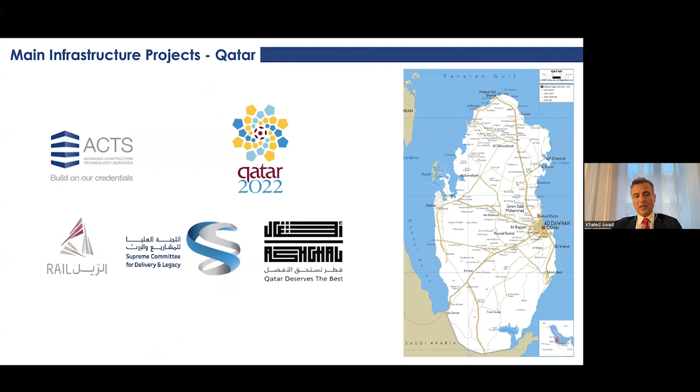To be able to do the presentation, we had to get information from RAIL, the Supreme Committee for Delivery and Legacy, the rail authority in Qatar, and the Public Works Authority which is called Ashghal.

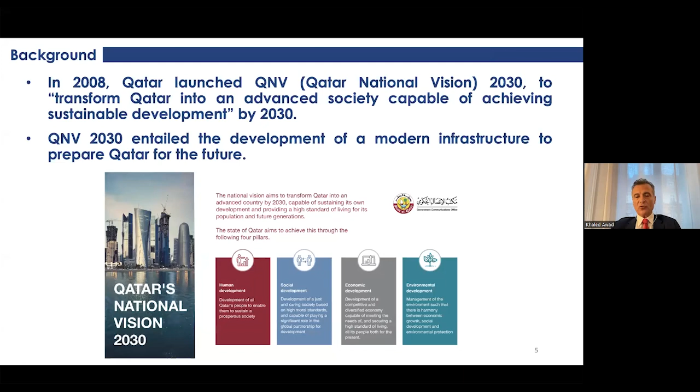Before it won the World Cup, Qatar started in 2008, launched the Qatar National Vision 2030, which was supposed to take Qatar and make it an advanced society capable of achieving sustainable development by 2030. They made this vision implementable through identifying 4 main pillars: human development, social development, economic development, and environmental development. These 4 pillars were really driving Qatar's spending during the last 12-13 years since they launched the vision.

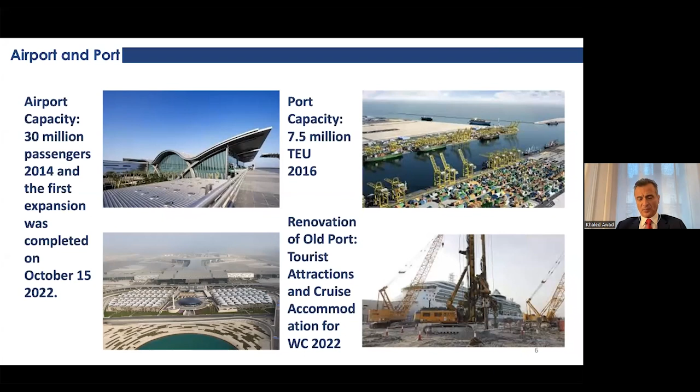Qatar today has a 30 million passenger airport, which was started in 2014; the first expansion was completed last month, 15 October. They have a port capacity of 7.5 million containers, this is back in 2016. However, the old port was not just wasted - they use it today as a tourist attraction, and it will be the place for the cruise ships that come to Qatar, because Qatar is trying to have different types of accommodations: hotels, major tents built in the desert, and also the cruise ships. Not just a new airport and a new port.

Qatar built a new city, a completely new city called Lusail City. Lusail is a city that was supposed to be smart, very interconnected, modern, and a new city out of scratch, out of nothing in the desert. It's spread over 38 square kilometers and will accommodate around 500,000 people.

In addition, Qatar thought about its water security issues. It has gas, so there's no problem with energy, but it cannot start planting desalination plants all over the place. So they put a strategy for water security, which is the water mega reservoir. They built the biggest water reservoirs in the world in 5 different locations, 15 reservoirs, with an approximate capacity of 1,500 million gallons.

Also, they started from scratch a metro project. This is phase 1, where they connected the different parts of Doha with also the other parts which go to the stadium locations. And inside the new city, Lusail, the smart city that I was talking about, they also built a light rail transit network.

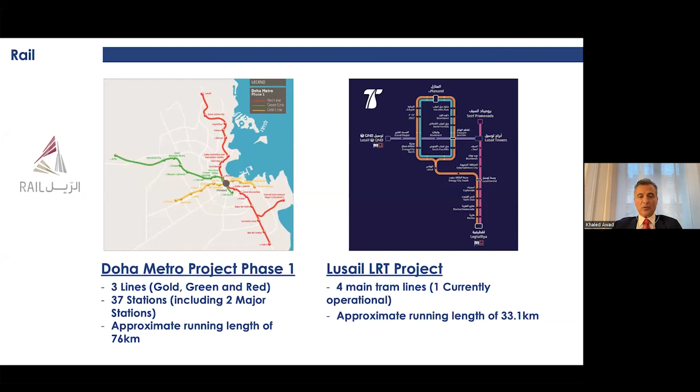In addition, major infrastructure projects like highways, airports, bridges, orbital highways around Doha. The idea was not just to build roads to connect to the stadiums or to connect to the new cities, but also to be able to build an industrial base. That industrial base was something new for Qatar because it has gas, so power is available. Qatar was able to start a new manufacturing base, and to connect that base with the port and the airport, Qatar developed all these corridors, ring roads, orbital and expressway projects.

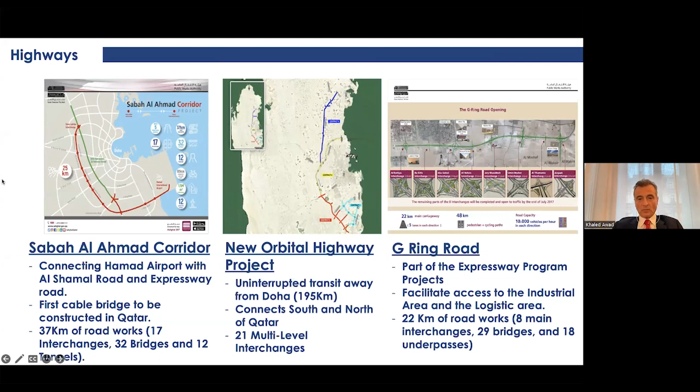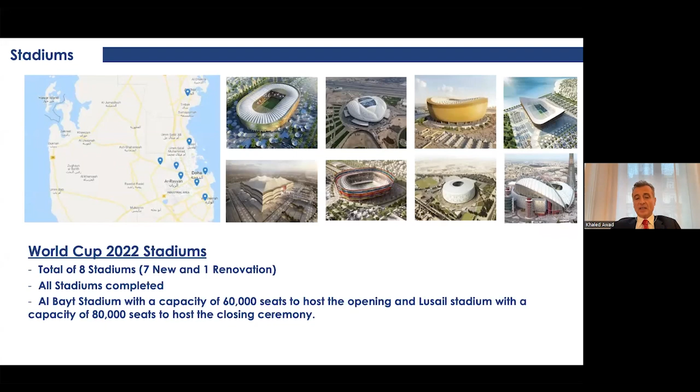So we'll talk today about the stadiums, a total of 8 stadiums, 1 that was existing which they just renovated, and 7 new. All the stadiums are now completed. The games start on the 20th of November, so in 10 days. The Al Bayt Stadium has 60,000 seats and will host the first match on the 20th of November. And the Lusail Stadium, built in the new city, has a capacity of 80,000 seats and will host the closing ceremony.

Let us talk about the stadiums in a little more detail. In 2010, when Qatar won the bid, it announced plans to build 12 stadiums. But ultimately, it reduced the number to 8. First, because there were so many costs and potential delays, but also Qatar found out that they don't need 12 stadiums, 8 could do the job, and FIFA accepted that with them. They established a Supreme Committee for Delivery and Legacy to oversee the construction of the stadiums and the legacy after 2022. And because of the major undertaking, Qatar also earmarked $10 billion for the construction of the 8 stadiums and the infrastructure around the stadiums, not the total infrastructure, just the one around the stadium.

The key component that made Qatar win the bid is the legacy part. This was their winning point. This is how they won over the US in 2010 when the bid was out. And this is how Qatar could survive all the negative comments on their human rights and everything, because there were so many people who were not happy with Qatar, a small country not on the football map, winning that bid.

However, Qatar proved that it deserved to win this bid because of many things. First, it delivered on the projects, but most importantly, it delivered on the legacy mode. And by legacy mode, what would a small country like Qatar do with all these stadiums where there is no population, no big regional or national football events? So this would be a waste of money or a waste of time. So what would Qatar do?

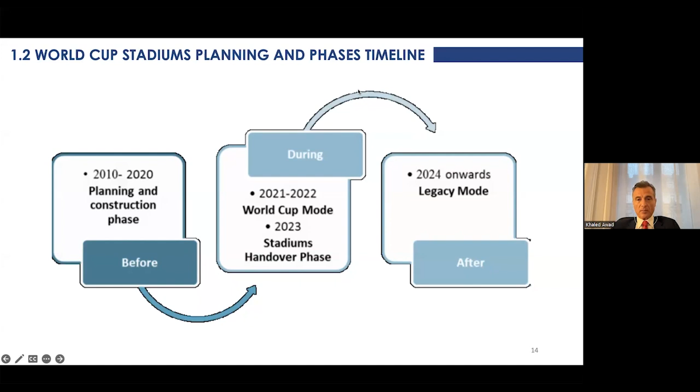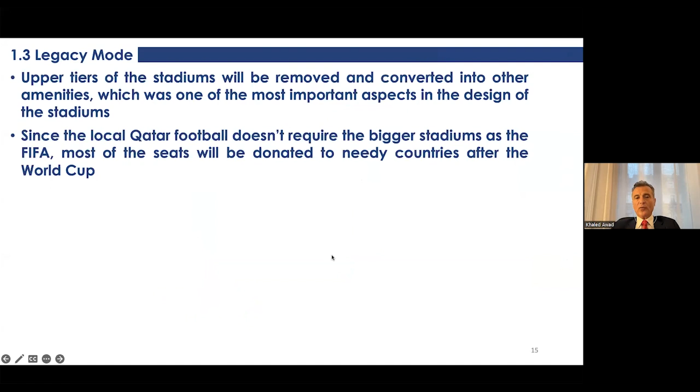The upper tiers of the stadiums will be removed and converted into other amenities, which was one of the most important aspects in the design, because Qatar doesn't need all this capacity. That means players and spectators could enjoy the intimate football atmosphere again, but also with upgraded facilities. Some stadiums will have hotels inside them, so there are many new things that will come inside the stadium, and it will become part of the fabric of social life in Qatar.

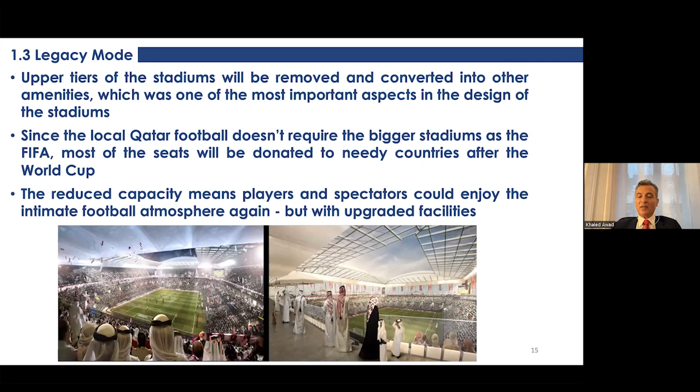This is something Qatar was really forward thinking in, because people used to go to the stadium just to watch a game. Now they can go to the stadium and bring their families, put them in the mall, and they are watching the game. That mixture between sport and entertainment is something no one has done before.

There are 8 stadiums in the small country of Qatar. One is Al Bayt in the north, and one in the south, Al Wakrah, which are the furthest two stadiums from each other, with 6 others within or around Doha. The most remote, Al Bayt and Al Wakrah, are only 145 kilometers apart. It never happened before that within a World Cup you had all these compact stadiums around a certain location, and all of them are connected through the metro network.

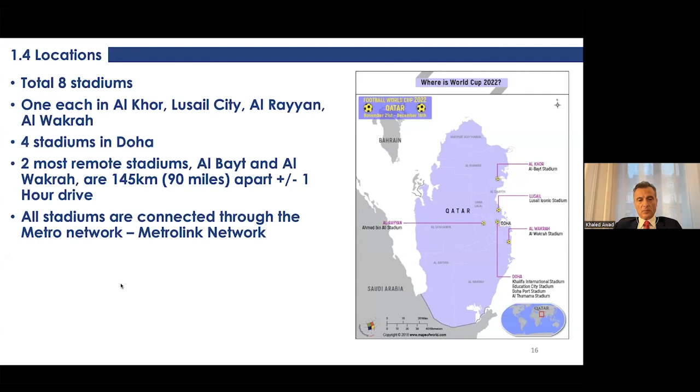The most iconic one is the Lusail Iconic Stadium. This is part of the new city they designed, and it will host the final. So hopefully if Mexico goes to the final, you can go there and watch that stadium firsthand. It is really an iconic structure, something that is very impressive.

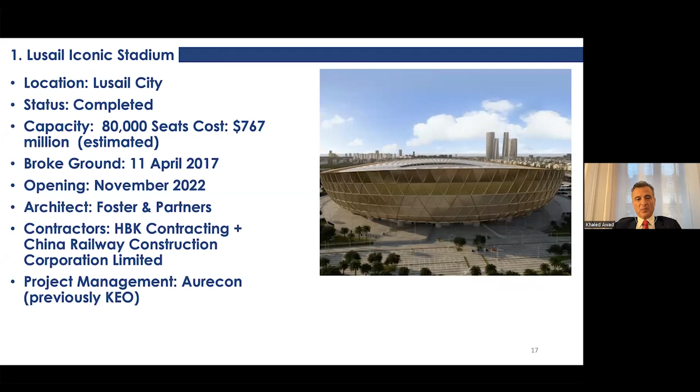It was designed by Foster and Partners, with local contractors and China Railway building it. The Aurecon, which recently bought KEO, the Kuwait Engineering Office, the Australian project management firm, was behind that project management. It will host the final game.

The inspiration of the stadium is the fanar, the old type of lanterns the Qataris used to use in the desert. It will be transformed into a community space after the World Cup, with schools, shops, cafes, and sporting facilities, and hopefully it will be a catalyst for the growth of the new Lusail city.

It is very environmentally progressive, with close monitoring of carbon emissions and controlling environmental impact during construction and during the operation phase.

For that structure, they used ACI 318, the building code you may be familiar with. The service life design was for 60 years, with strength of 45 and 60 MPa on different sections, and around 150,000 cubic meters of concrete were used.

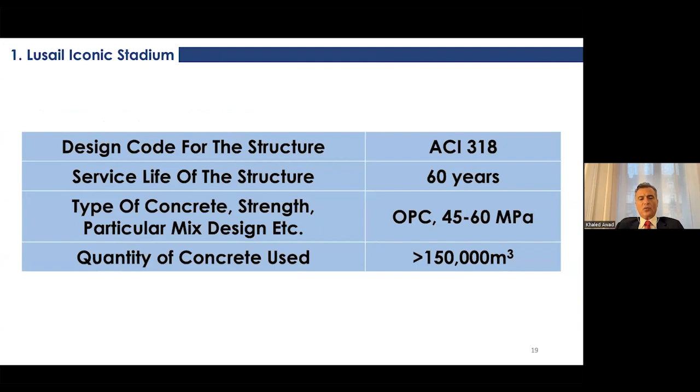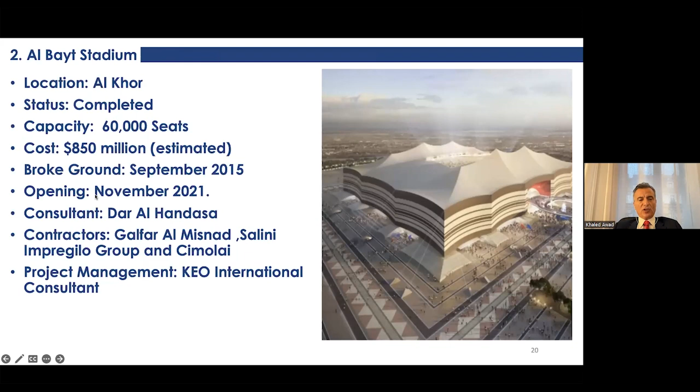Al Bayt Stadium is in Al Khor, in the north. It is completed, with 60,000 seats, costing $850 million. Construction started in 2015 and it opened in November 2021. The consultant is a Lebanese engineering office called Dar al-Handasa, with local and Italian contractors, and the same project management company, KEO.

It will host the first match between Qatar and, I think, their first challenger, and it will also host matches through the semifinals. It scored very high on the Global Sustainability Assessment System, GSAS, which Qatar used for all their construction and infrastructure.

The concept of the stadium follows a Bedouin tent, called the Bayt Al Sha'ar, the way people had big tents to have everybody in it. It has a canvas-like facade, and the upper tier will be removed and all gifted, with the final number of seats being 32,000. Around 28,000 seats will be gifted and used by the local team in Al Khor.

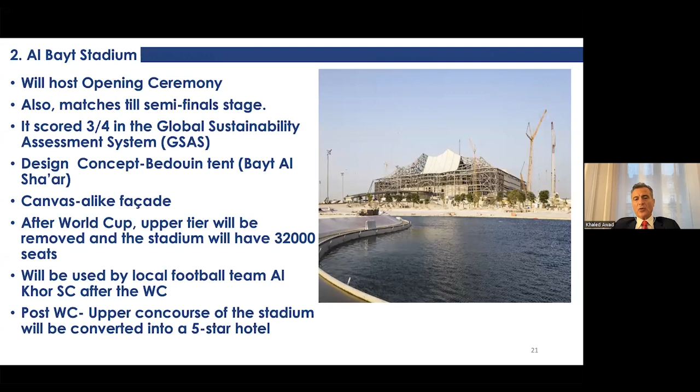There will also be a 5-star hotel in the upper tier part. In Qatar, they don't follow 100% ACI 318, but sometimes a combination depending on wind load or earthquake requirements. Here they followed ACI 318 building code and Eurocode, with a service life of 50 years. They used different types of cement, and the quantity of concrete used was 285,000 cubic meters.

Al Janoub Stadium is in Al Wakrah, the furthest one in the south. It has approximately 41,000 seats, costing around $800 million. It was completed 3 years ago, after 5 years of construction. Zaha Hadid, the famous architect, designed it, and AECOM did the local engineering design, with a local contractor and the Belgian construction company Six Construct doing the work, along with the local project management company.

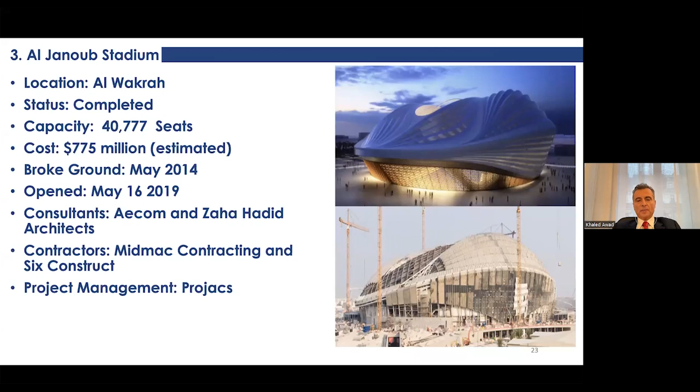Al Janoub Stadium was the second one to be completed, and it is top rated by Qatar's sustainability system. It will host matches up to the quarterfinals, and has a very specific design, looking like the sails of the traditional dhow boats that you used to see in the Gulf.

It has shade and an aerodynamic design to reduce the wind effect, and all the mechanical systems utilize the design shape to reduce the amount of air conditioning needed and reduce the impact of heat. 20,000 seats will be donated, and the upper tier will include a school, wedding hall, cycling tracks, restaurants, etc.

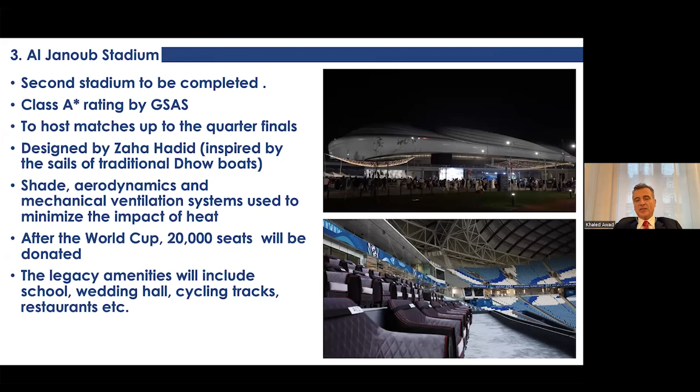The grass turf of the stadium was laid in a world record time, 9 hours and 15 minutes. These types of things helped a lot in finishing these stadiums on time. They brought different suppliers in different areas, and this grass turf supplier committed to lay it in such a world record time.

The roof is retractable, so it opens and closes, and it's all titanium dioxide coated membrane. You can open it completely and close it with steel wires if you have sudden rain or something.

The design of the stadium and the surrounding is around 85,000 square meters, so there is a lot of infrastructure around this one. They used special timber from Australia, which has very low environmental impact. Actually, part of it is recycled.

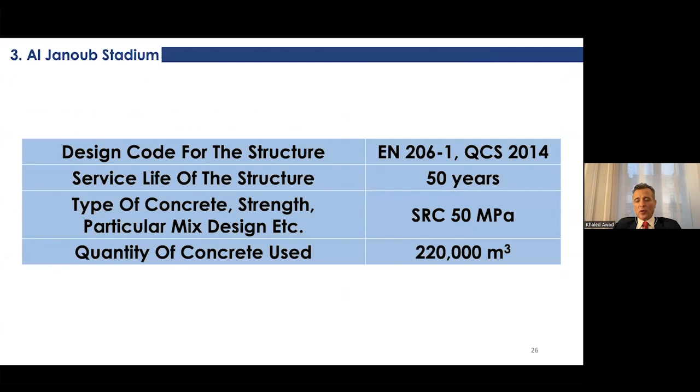Here, they didn't use ACI, they used the European building codes. Service life is 50 years. They used sulfate resistant cement, the old nomination of cement, and around 220,000 cubic meters were used. Let's have a look at this stadium.

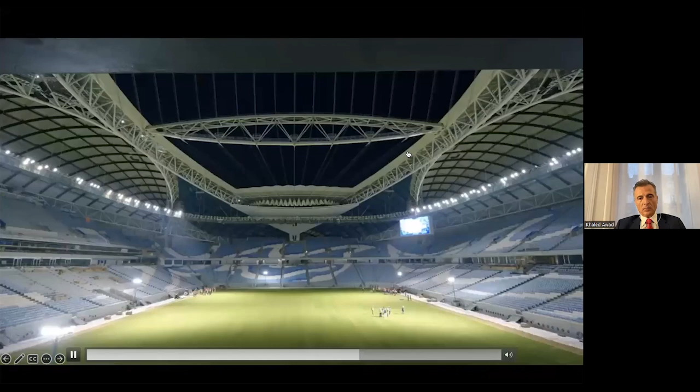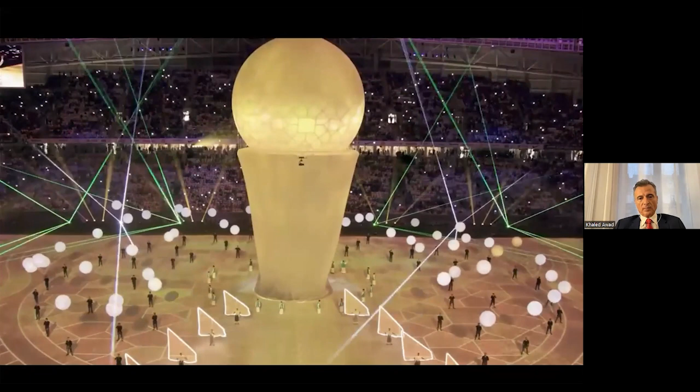That gives you an idea of the scale of the stadium and the work that was done in it. All of these stadiums started from scratch and in a record time, and they had COVID in the last 3 years, which really delayed some of the work, but still Qatar was able to achieve everything on time.

Education City Stadium is completed as well, 45,000 seats, $650 million. It started in 2016, opened in 2020. Fenwick Iribarren Architects, and the contractor was Joannou and Paraskevaides from Greece, and a local project management company.

It will host matches through the quarterfinals. Seating capacity was increased recently by 5,000 seats, and the stadium takes the form of a jagged diamond.

Remember the Gulf countries were in the Middle East. They used to look for pearls through their fishing boats, their dhows, inside the sea, and they found diamonds sometimes. This diamond has also a symbolic value for the locals in the region. It will glow by night, so it's also fancy.

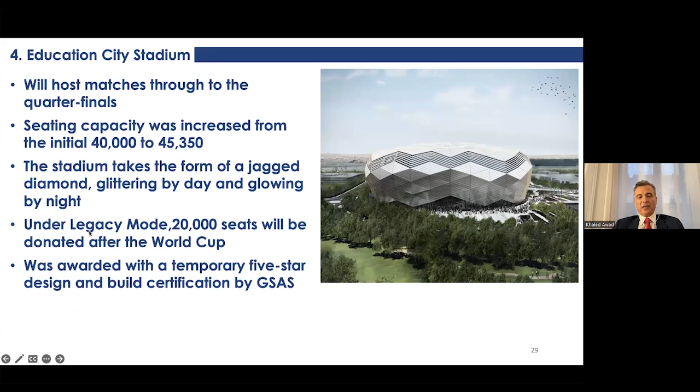20,000 seats will be donated after the World Cup, and it also had a high rating for the environmental impact.

They used ACI 304, EN building code, and Qatar construction standards. Qatar, as part of the vision, wanted to have some local standards that reflect more what is happening in the country. In 2010, Qatar started a new standardization body, and they issued Qatar construction standards in 2014, which is the second version. This is what's governing mostly now today's Qatar construction.

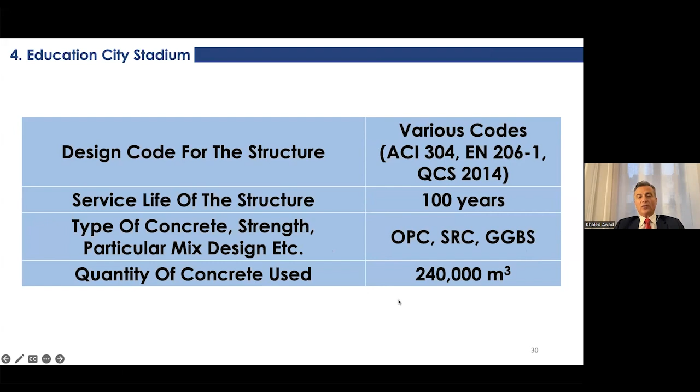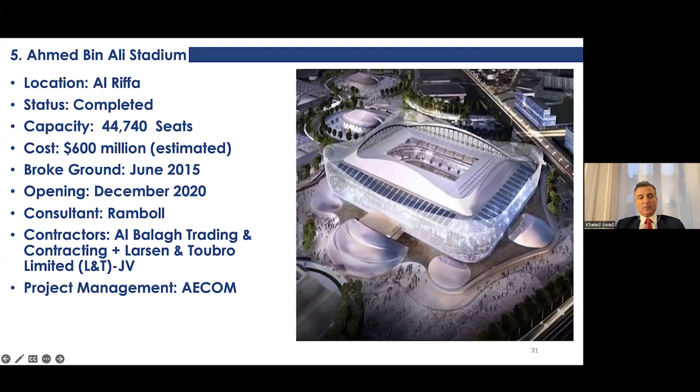The Ahmed bin Ali Stadium is in Al Riffa, again close to Doha. It is completed, 45,000 seats, $600 million. Started in 2015, finished in 2020. Consultant is Ramboll, and the contractor is local, and the Indian company Larsen and Toubro, and project management AECOM. It will also host matches to the quarterfinals, 4-star on the GSAS.

It was built in place of the existing Ahmed bin Ali Stadium. Again, it was inspired by local culture as a large tent and desert landscape. They used many of the materials that were taken from the existing Ahmed bin Ali Stadium, which was demolished.

So the renovation includes a huge media facade and a membrane that will act as a screen for projection. Even part of the facade is going to be projections for ads or films, or could be done as a cinema in the future.

Post 2022, around 50% of the seats will be donated as well. Here, ACI 318 and Qatar construction standards were used, 60 years design life, different types of cement, mixed design, 60 MPa, and around 100,000 cubic meters of concrete.

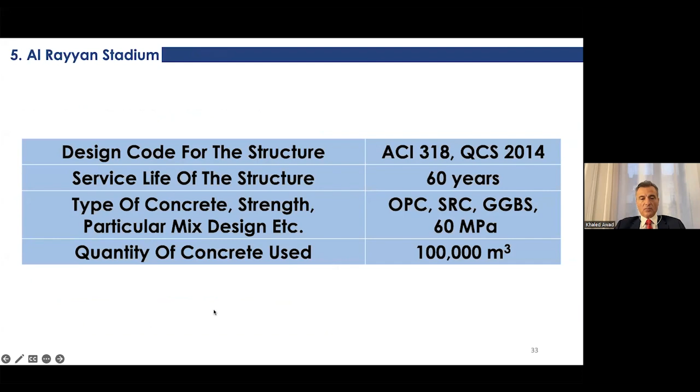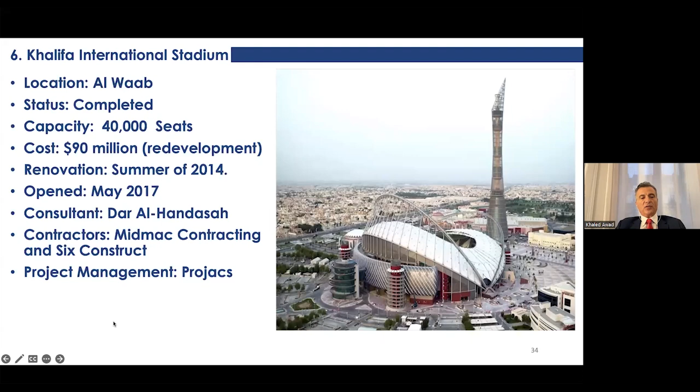This is the first venue to be completed because the stadium existed. This is the only renovated stadium, so this is built on an existing one. It will host matches up to the quarterfinal, 4-star on the GSAS.

The renovation included a completely new upper tier of 12,000 seats, in addition to a new facade, LED lighting, digital floodlights, and a new roof.

Unlike the other stadium, this is not a modular stadium, so you cannot dismantle it because it's all concrete. It is part of the Doha Sports City Complex, a new sports quarter in Doha.

Qatar established a new academy to train people on different sports, football being one of them, getting the youth from early ages to train on different sports and football. This Aspire Academy will be hosted in this area.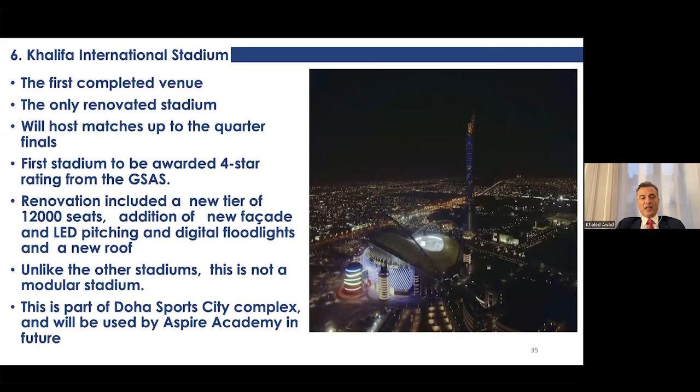In the construction phase, to support the roof holding 92 panels in place, around 4,000 tons of steel tension cables were used. A special operator was brought from India to install a section of the arches, which weighed more than 47 tons. Even the crane weighed more than 600 tons.

So the scale of the weight was unbelievable. It was too big to handle, and very uncharted weights being lifted. The highest point of the stadium is going to be 100 meters above the ground, so it's quite high. It took 3 years to renovate the whole stadium.

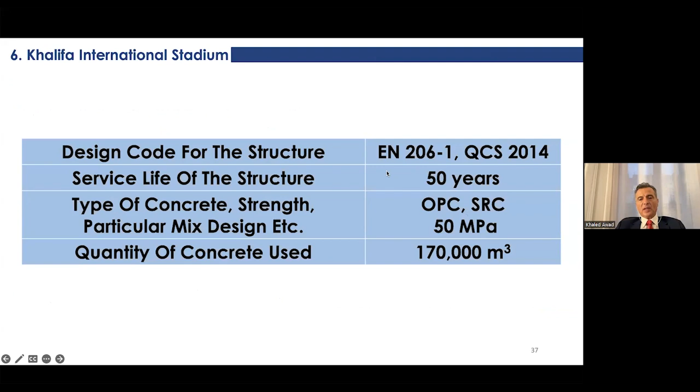The design code is European and local standards, 50 years design life, different cements, and 50 MPa concrete, 170,000 cubic meters.

Now this is where Mexico is going to play, the 974 stadium. It was called Ras Abou Abboud, an area near the sea, but they changed the name to 974 because it is built all from ship containers - it has 974 ship containers.

So it's all modular, all built with containers, which will be all dismantled, and the whole stadium can be built somewhere else. I believe this one was gifted to Morocco, and it will be transported after the World Cup to Morocco on Qatar's expenses. This is really something that has never been done before - moving a complete stadium.

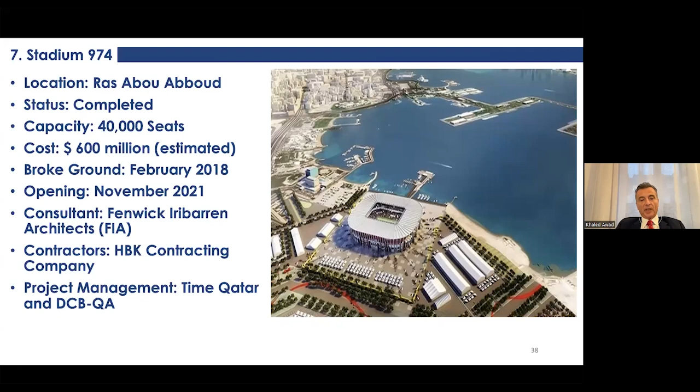To do that, they used 974 shipping containers, and this is where the new name is coming from. It was done by Fenwick Iribarren architects, HBK local contracting company, and local project management companies.

It will host matches up to the quarterfinals, all modular recycled shipping containers and modular steel elements for the concourse area, stands with around 8mm folded steel plates, and roof using modular truss. It will be completely dismantled and reused outside Qatar.

So less material, less waste because of this modular construction. They used Eurocode for that, 50 years, sulfate resistant cement, and 40 MPa, only 30,000 cubic meters, because it's all container steel - concrete only for the foundations.

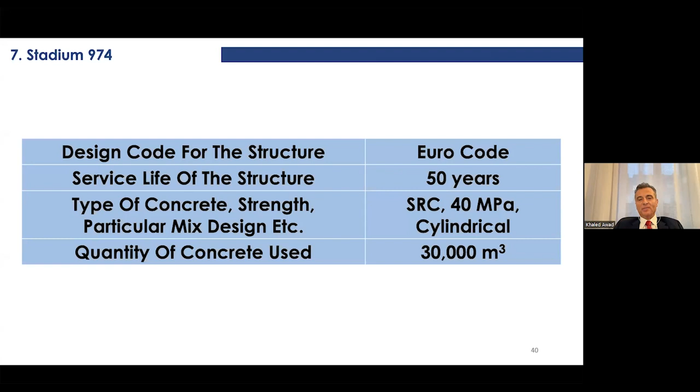Al Thumama is in the Al Thumama area, again close to Doha. It is completed, 40,000 seats, $345 million. It took 5 years to build, with local consultant and Turkish and local contractor and project management in Qatar.

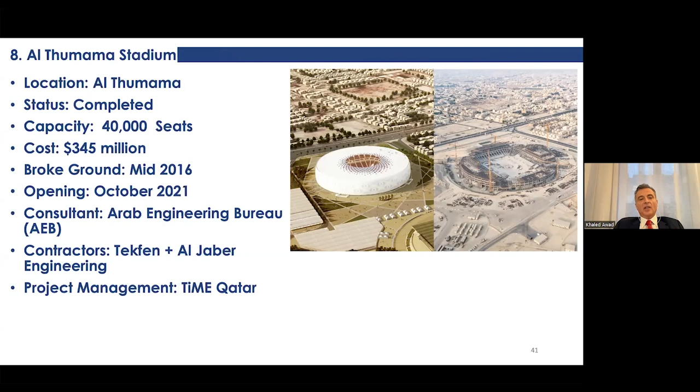This is the only stadium that was designed by a local Qatari architect, who took the old hat model of the Qatari hat and designed the stadium around that. It has got many awards, and it will be the showcase for all the World Cup projects that were done.

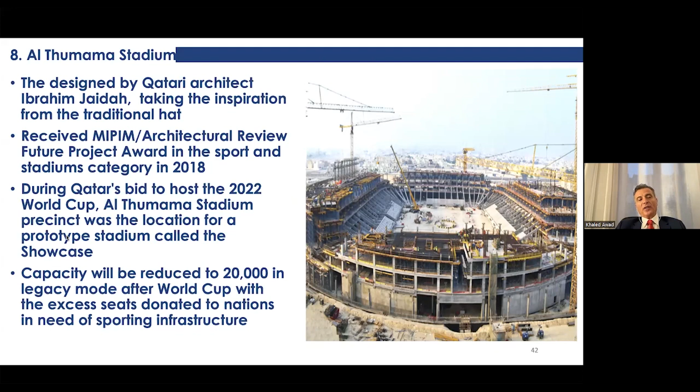The capacity of the stadium will be reduced to 20,000 because around 20,000 seats will be donated to other nations. It used Eurocode, 50-year service life, both ordinary and sulfate-resistant cement, 85,000 cubic meters. So that's the stadium story.

Now let's talk about the infrastructure. The challenge for Qatar was not just to build the stadiums, because you can build them and then you cannot reach them. So they had to really have a big infrastructure roadmap.

Just to give you the scale of what happened in Qatar, in 2017 the finance minister announced that Qatar was investing around $500 million every week in infrastructure. That gives you the idea of how much money was being spent. Total spend is approximately evaluated by MEED, the Middle East Economic Digest, and other sources at more than $200 billion, including the stadiums.

So 20 billion on roads, 40 billion on train and metros, 25 billion on airport and new port, 5 billion on hospitality projects and hotels, and 30 billion on other construction projects related to the infrastructure undertaking.

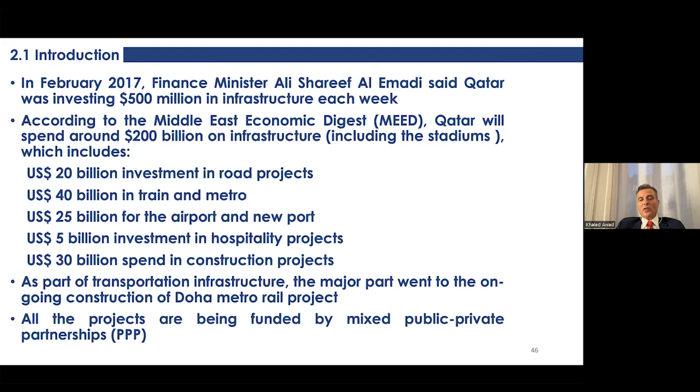As part of the transportation infrastructure, the major part went to the ongoing construction of the metro project. All the projects were being funded by public-private partnerships, with investors coming and participating in the financing of the project.

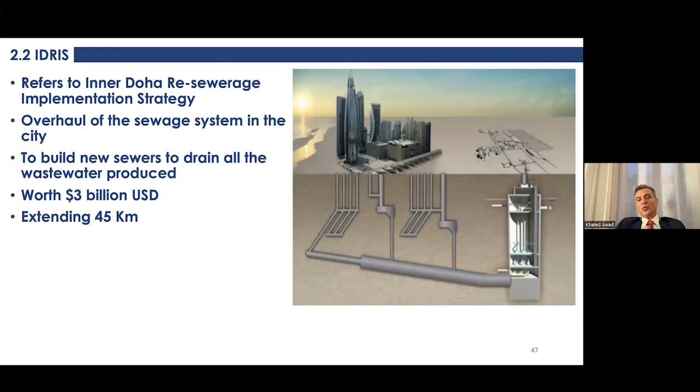Another challenge was the sewage and wastewater network. Qatar launched IDRIS, the Inner Doha Resewerage Implementation Strategy, a huge overhaul of the whole sewage system. They built new sewers to drain all the wastewater produced, costing around $3 billion, covering around 45 kilometers across the capital city of Doha.

The expressway is the major road network. It is a key component of the vision because connectivity was part of the mission of Vision 2030, at around $14 billion for that project. It has 51 separate projects, including the orbital highway, the highway to the new city, and the east-west corridor, which will be the backbone of Qatar's growing road network.

It has already started relieving traffic congestion within Doha, with a lot of underpasses and flyovers, which we'll see in the course of the presentation.

Part of that expressway was the new orbital highway, which goes around the city of Doha. It is a main traffic reducer or mitigator for the whole city, similar to major Western cities. I think Mexico has an orbital highway, and Paris and all the major cities have them. This is going to be key to reducing traffic in Doha.

It connects with different key highways. As I mentioned, the idea is not just to get to the stadiums, but also to connect new areas, new cities, new industrial bases, residential areas, and business areas to Doha, to the airport, and to the port.

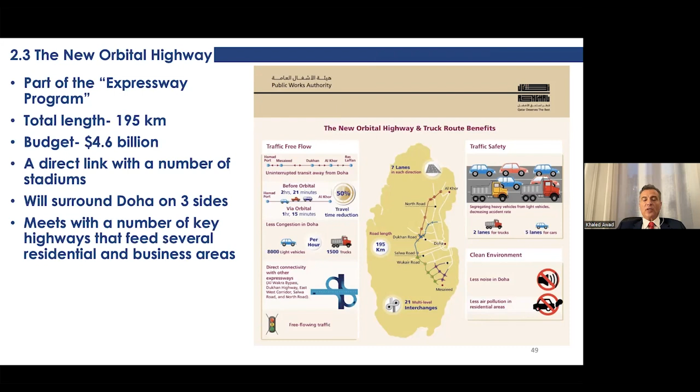Now, Doha Metro, as I said, is the biggest undertaking because it started from nothing. It has underground and overground sections, with many different parts, and the water table in Doha is high, so you can imagine the kind of excavation and dewatering that was done.

It has 4 lines, 300 kilometers, 100 stations, and 2 phases: the red, golden, and green lines. It started in 2019 with 37 stations. I used it myself, it's very user-friendly.

What the Qatar government did in the city of Doha was have buses around each station that move people to certain places in the city if the metro doesn't reach that place. So it's a combination of metro and buses to reduce traffic congestion in the city.

There is another phase that started. Qatar saw a lot of value in this metro, and I think it will be completed in 2026, the blue line, as they call it. The total cost is around $36 billion, and this metro will connect to all the stadiums.

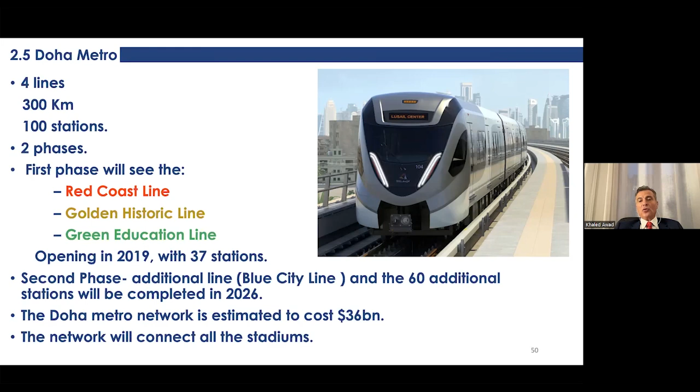That's an idea about the metro lines that take you from the north to the south and the west to the east.

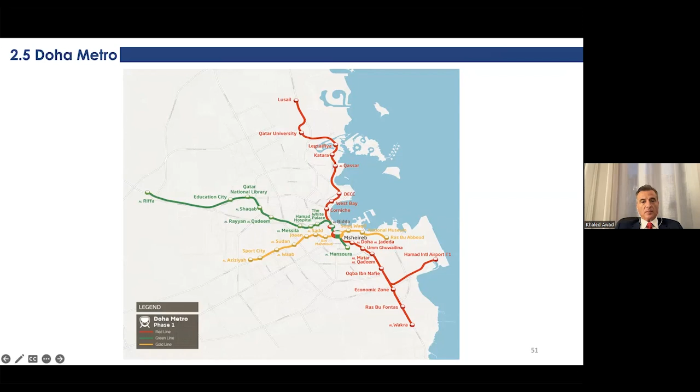Now the Sharq crossing is a huge crossing to an island, with 3 parts all connected under an underwater tunnel. The 3 bridges cover lengths between 600 and 1,300 meters. They will connect Doha Airport with the north of the city, and the idea is to be able to get out of the city and reach the airport without needing to go through the city.

The most sophisticated part is the West Bay Bridge. It will have the largest arch span in the world and will connect the shore with the marine interchange. This bridge will not just have a crossing, but also a park and food outlets, so you can stroll and stay on the bridge, using transportation as a destination, not just as an access means.

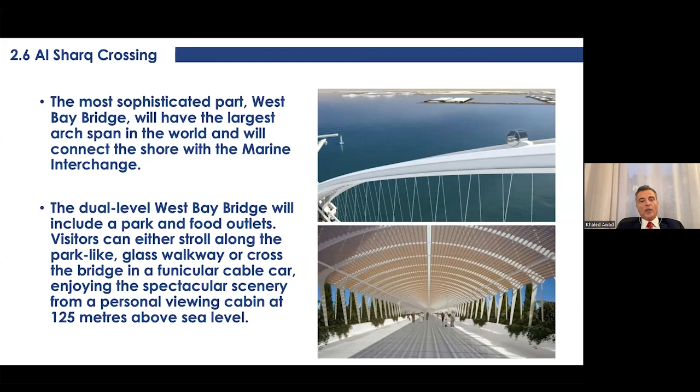This is a high bridge, 125 meters above sea level, so you can also enjoy the view, especially at night when you're there.

Other notable projects: Qatar is building a solar plant, 800 megawatts, and although it has gas, it is still diversifying its energy source. There's a new island, Qetaifan Island, one of the biggest projects, and the Qatar National Museum, a very sophisticated museum built with white concrete. All these projects were done in parallel as part of the infrastructure upgrade Qatar was doing.

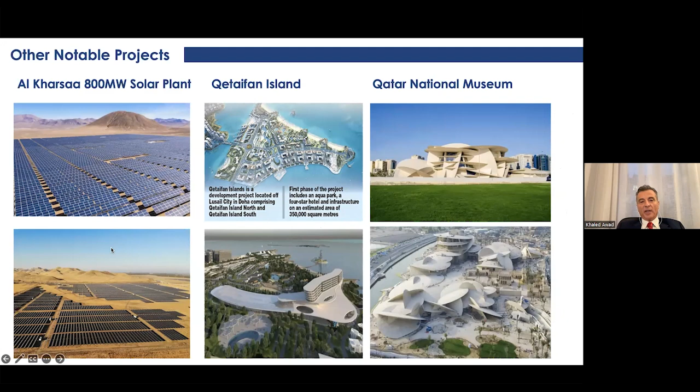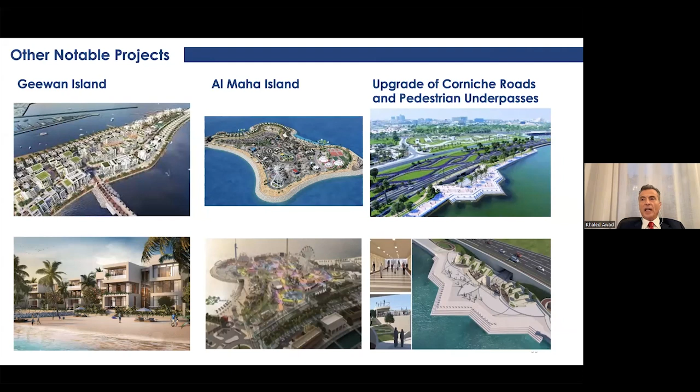There are other projects coming up, including Geewan Island, Al Maha Island, and another upgrade for the Corniche Road. So people think, what would Qatar do after 2022? Well, the projects lined up aim to transform Qatar into a hub for many things: a sports destination, tourist destination, business destination, and industrial destination. This is how Qatar is looking at the World Cup as a transition in their Vision 2030, from a Gulf country known for gas to a Gulf country that becomes a destination.

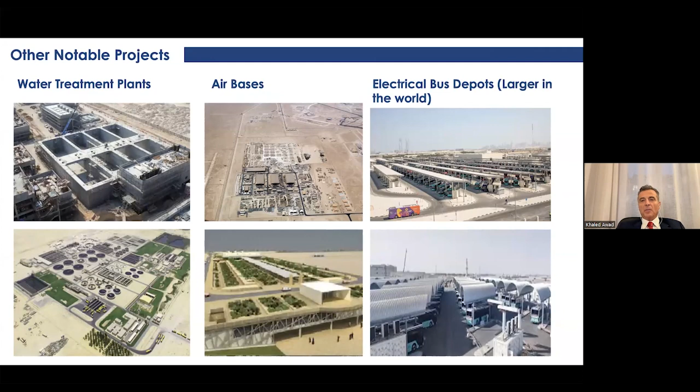Electrical bus depots. Again, these are all world record in terms of size.

Now, all this hasn't been built by push button, so you would imagine that there were major challenges for the construction. First of all, the major challenge was time.

Remember, I mentioned a bit about the Middle East in the beginning. The Middle East has the highest temperature, the Gulf countries, especially places like Qatar, highest temperature, highest humidity in the world, more than the Caribbean. The temperature easily reaches 45 degrees in summer, even 50. In addition, it's surrounded by the ocean, so you have airborne salts. That's the recipe for corrosion, the perfect recipe for corrosion.

And when you add fast track projects to that, imagine the challenges you have to go through. Because we are a company that does quality control and testing, we were implicated in things we had never seen before during our 30 years of operation. There are tasks related to finishing on time, but also quality, durability, sustainability, environmental impact. All these were done in parallel, so from a project management point of view, it was quite a nightmare.

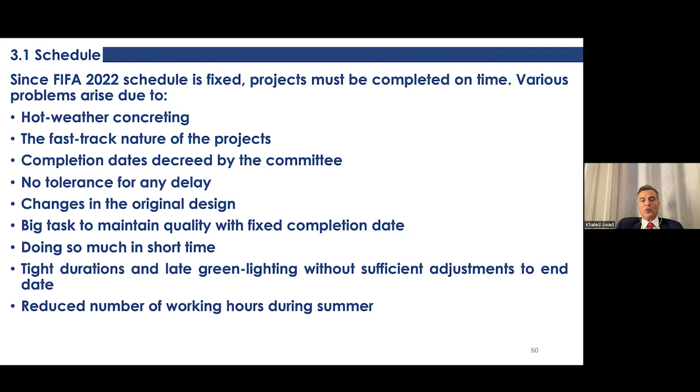Now, this is the smallest country to ever host a World Cup. Qatar is expecting 1.5 million visitors in a very short period, less than a month. With the opening of the airport and the expansion, they will reach 5,700 visitors per hour during the World Cup, just from Dubai. Qatar will receive 80 flights daily just from Dubai, forget Abu Dhabi or other places in the world.

So Dubai jumped on the bandwagon immediately and launched a major flying campaign so people could go watch the match and come back to Dubai if they wanted, around 80 flights per day, actually more. There will also be an upgrade of the land border because people will come from Saudi or the UAE by car. There will be free shuttles, like the metro station, and the metro timing will change till 3 a.m.

And the public bus fleet has been expanded in a big way with electrical buses. This is the new thing.

So again, this is a compact development. Within a 55-kilometer radius you have all the stadiums. Just an example: Germany, 400 kilometers; South Africa, 700; Brazil, 1400. So Qatar with a 55-kilometer radius is quite an undertaking to build all this in a compact way. It may be an advantage environmentally for transportation and other purposes, but operationally and logistically it was quite an issue.

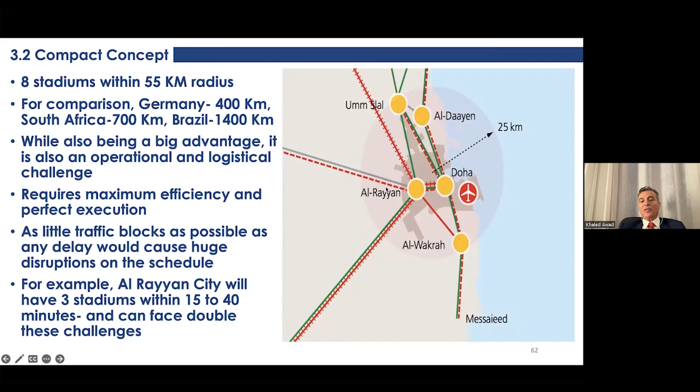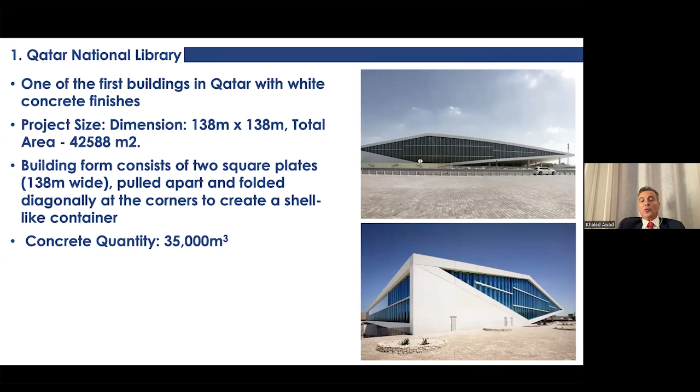Now, you would say, why was this a problem? Because we had to monitor the concrete poured from up to bottom, not the way we do it normally, and that was quite a challenge as well. Workability was the issue, the sequence of concrete pouring, the finishes—many trials and errors and mock-ups were done to see how we could manage that.

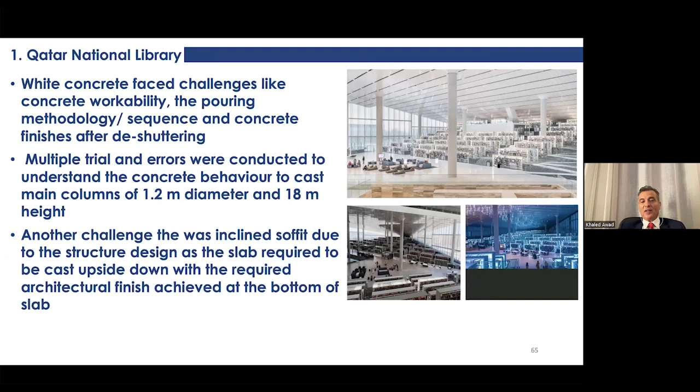Then there was also the inclined soffit because of the structural design and the casting upside down, which really complicated the whole construction phase. And you had to have a fair face finish on the column, so it was another challenge to have concrete that was white and fair-faced.

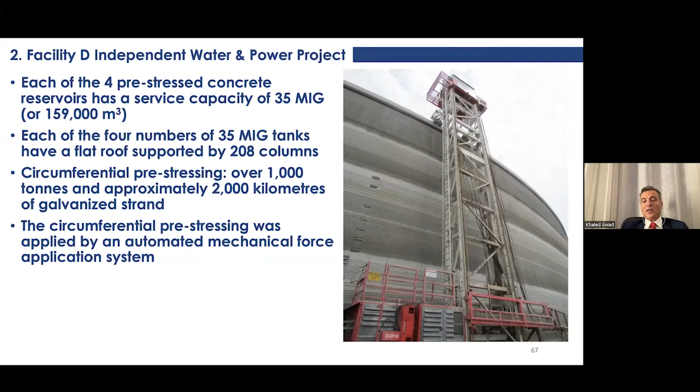Each of the reservoirs will have 159,000 cubic meters, 35 million gallon capacity, around 208 columns for the tanks, circumferential pre-stressing with more than 1,000 tons, 2,000 kilometers of galvanized strands. Imagine the length of the strands used. The circumferential pre-stressing was applied by an automated mechanical force application system, so it was all built through robotic systems. Let's have a look at it.

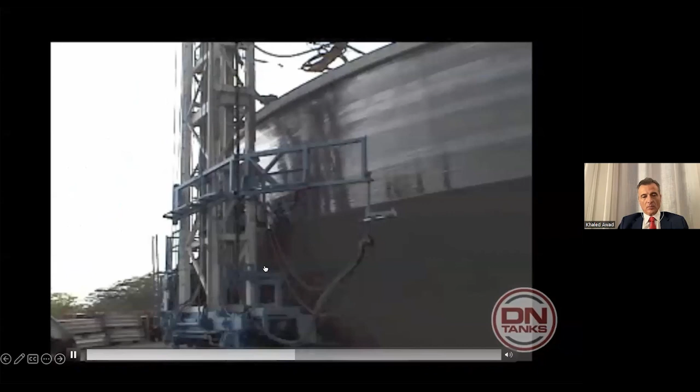This is the time lapse where you'll see how things are being built.

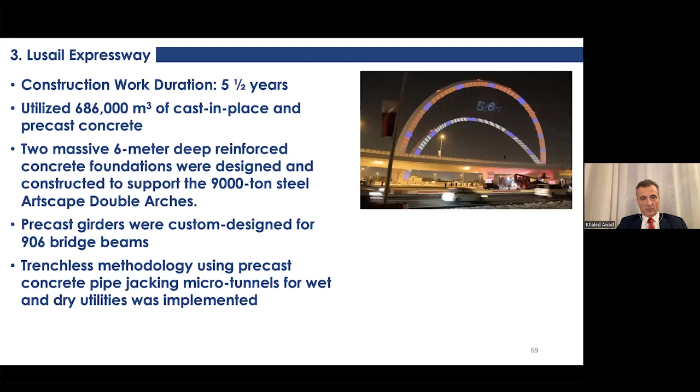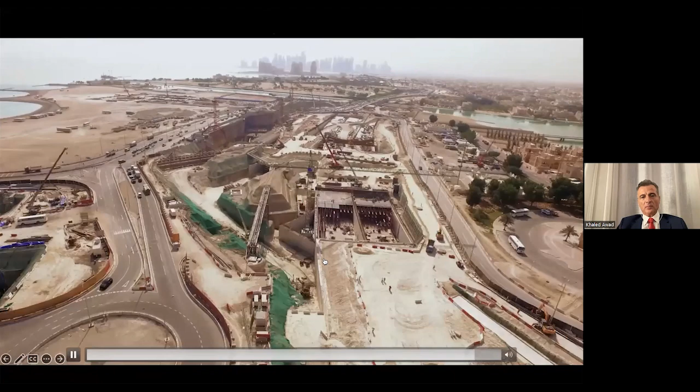So just to put things in perspective, in 2010 Qatar had 2,500 kilometers of highways. It has now more than tripled that number with 8,500. Local roads totaled 9,500, today 34,000 kilometers. 160 bridges, now 200. 2 tunnels, now 32. 2,000 buses, 84 kilometers of metro, and 10 stadiums, including the existing one.

So let's talk about the fancy part of the FIFA World Cup this year in Qatar, because you will hear so many comments, some positive, some negative, but Qatar managed to really navigate all this and get something that will be, I think, to the expectation of every football fan.

As an Islamic country, Qatar doesn't offer alcohol except in the hotels. But Qatar provides several fan zones where alcohol is openly served. For accommodation, not just hotels, but because of the sheer scale of visitors, 70,000 hotel rooms may not be enough, so they brought in cruise ships in addition to building a tent area inside the desert.

Number of flights is unseen before in Qatar. Just 80 from Dubai and around 1,300 in total daily from different destinations in the world and the region. This is the first ever Winter World Cup.

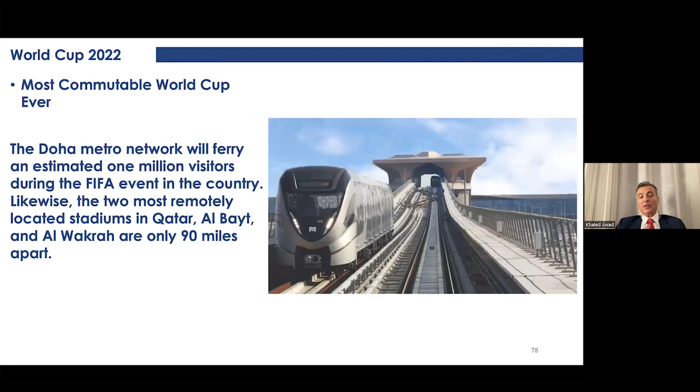Some of the stadiums will have air conditioning. If you feel very hot, because there will be matches around 2, 3, or 4 o'clock in the afternoon, you can come and take a break in some areas that are air conditioned.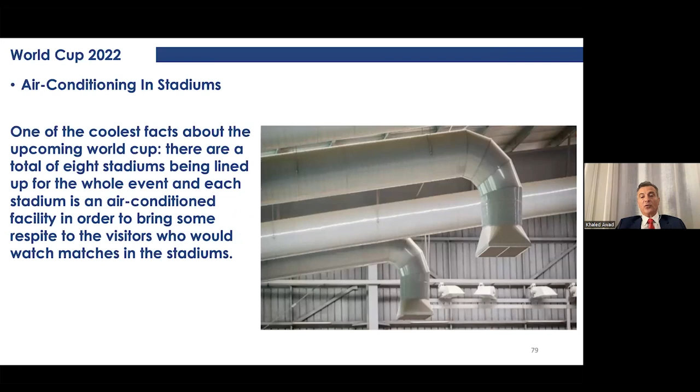This is the most expensive World Cup ever done. Just imagine the infrastructure, not just for the stadiums, but as a total investment and undertaking. This was a huge undertaking for Qatar, with 70,000 street lights and all the other numbers I mentioned about the infrastructure components - really mind-boggling.

I would like to thank you very much for your attendance. I hope you find something interesting in this, and I really would like for those of you who can visit Qatar to really make that effort and visit it. It is going to be worth your trip, and good luck to Mexico in this World Cup.

Thank you very much. Khaled, first of all, we thank you for the time. The talk has been amazing. I think we're running on time. We want to thank you, Khaled, for being with us. It was an amazing overview of what the World Cup will be. We hope your wishes to Mexico take effect. Thank you so much, we really appreciate it, Khaled. We will be very aware of what happens in the World Cup, and with your talk we will enjoy the World Cup even more. Thank you so much, Khaled. Thank you for inviting me, and I hope some of you can come and really feel what has been done in Qatar. And good luck again to Mexico. Thank you. Thank you, Khaled.